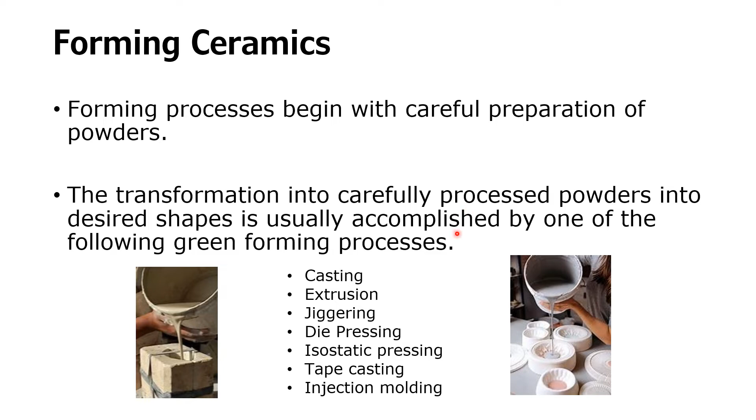I enjoy being alone more than going out with so many people. I don't know why. I'm typically a very shy person, and it's very quiet if you are in a remote place - just you and the mountains and the ground and air and some trees, and you can create things you cannot do inside of the city.

Okay, let's move on. The post-processing of ceramics is both difficult and expensive. We already know ceramics are hard and brittle after they are fired, and we always need expensive tooling and time-consuming processes to machine them.

So most forming processes are designed to produce a finished product, or one that requires very little post-processing, to avoid this expense and difficulty. Most forming processes produce, again, green ceramics, which have very, very low stiffness.

Here it is showing you how you're shaping your ceramics in the mold. And here you're using automation to shape the ceramics and form your green ceramics right there. Green is not the color - it's just the intermediate product of ceramics after forming.

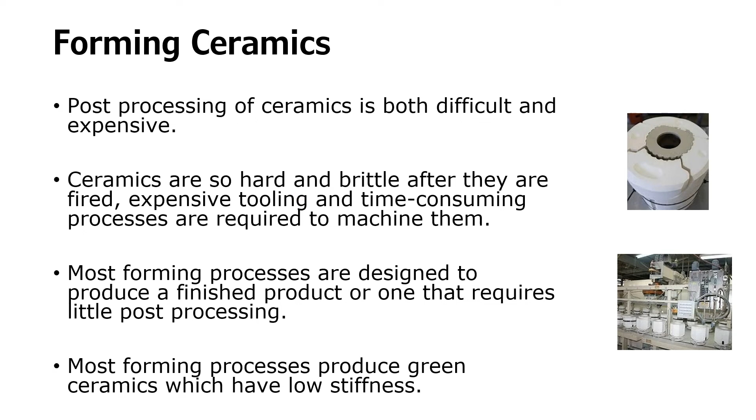Okay, casting. So in casting, we're going to take a look at slip casting. Most of the ceramic products are formed by this method, casting. We have two types: the first one is slip, and the other one is solid.

Slip casting is used to form hollow shapes such as toilets and sinks. Slip is a low viscosity ceramic slurry - slurry is nothing but when you mix and then form a slurry.

And slip is poured into plaster - we're going to pour it into plaster. So here you can see your slip right there, and this is us making slurry.

And then you're going to pour it into a plaster of Paris mold, which is in the shape of your product. It's a very easy process to do, and your product comes out - we call it green ceramic, green product, or green body.

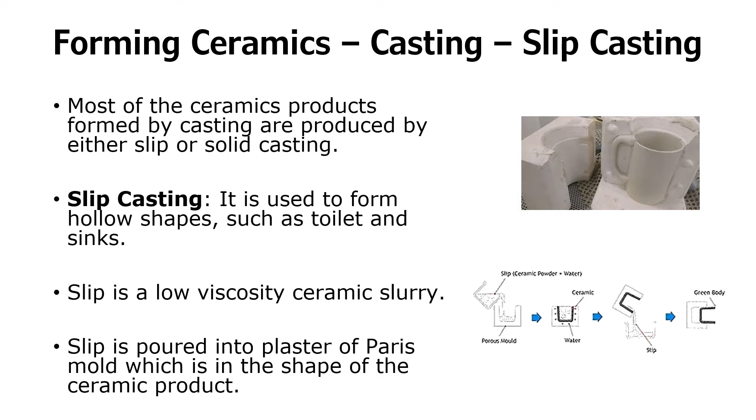So here is a cartoon picture, and you can see right here we're mixing - that's you preparing your slip or slurry. Then we're going to put it in the mold - this is your plaster mold - and it's just showing you how the liquid fills inside of that mold.

We're going to tighten the valve so it won't leak out. Give it time, and they're going to form the cast.

Then you're going to drain it. In order for you to make the hollow container bottle, so here in this case is a pot, you've got to drain the interior part of it. And in order to pour this liquid and keep that as a liquid, you have to play with the temperature very, very accurately. Otherwise everything is going to be jumbled up right there, and you're going to have a big mass or solid chunk. So going from here to here is a secret of slip casting.

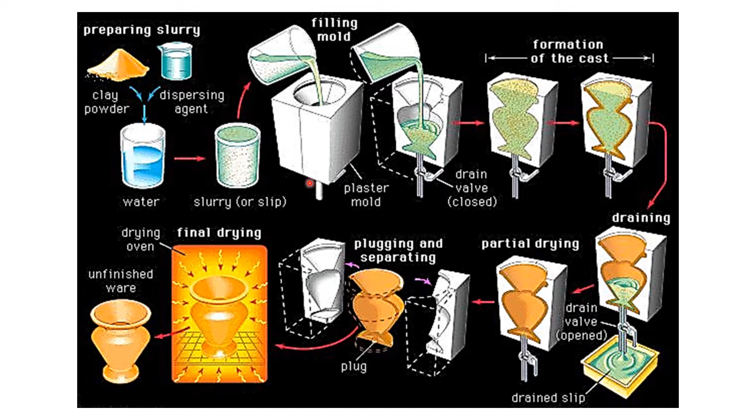So when you actually do molding by yourself, you're going to bump into so many roadblocks. First, the mold and your product stick together and won't come off. Second one, it won't drain. So definitely prepare the slurry in a way that they will come off and the interior part will drain. Now finally you dry it in the oven, or you can bake it outside as well. And this is called your unfinished, where your green product is going to come out. I think you got the idea. Your toilet, your sinks, many different kinds of bathroom and kitchen stuff are made this way.

This is a textbook version or picture. They're pretty simple. You have your plaster mold. You have your slip right here. The slip is poured into the mold. And here water is absorbed by the mold. So this mold is prepared to absorb the water from the slip. And the excess slip is going to be removed by draining it out. And then the finished hollow part is right there. And then you follow your drying process and then get it out of the mold.

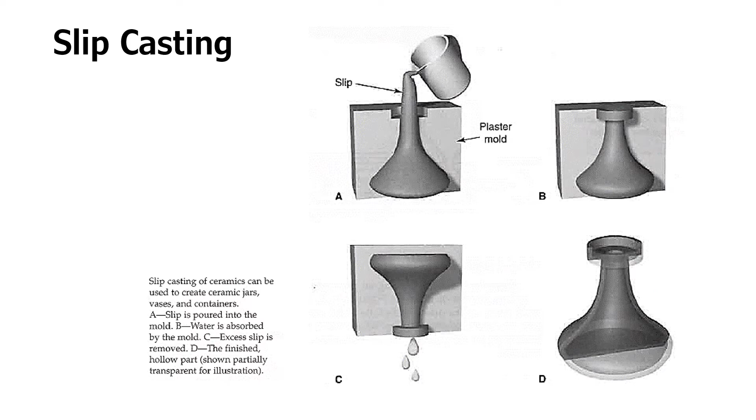Solid casting process is the same as slip casting, but the mold includes a riser column, a higher column, to feed the slip, and they use capillary action. So slip here, you can see, is poured into the mold, leave it for a time, and it's gonna solidify. And here you're gonna get your finished part.

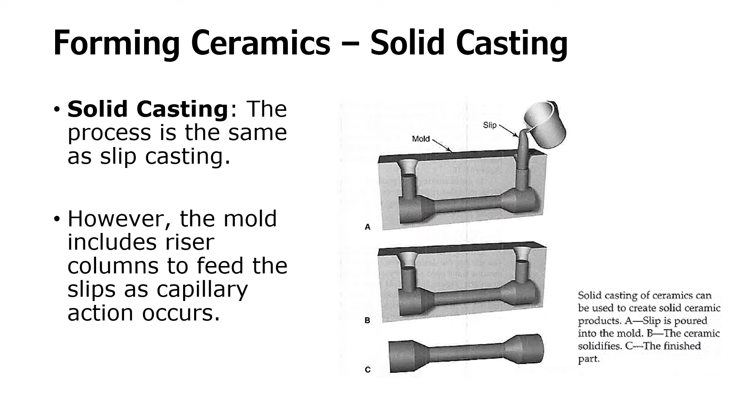Extrusion, kind of a review from your plastic, this is a similar looking extrusion instrument. So ceramics can be extruded using a screw extruder. And don't forget your heated barrel and your hopper. This is where you're gonna add your slip, or I would say just slurry for ceramics. And then you're gonna use your motor. It can also be done manually by hand. It's just mechanical energy that you are supplying to push this screw. And again, you have to heat it. Then you pass your die head, your cavity. So we make bricks, pipe, ceramic tubing, and some electrical ceramic components by extrusion.

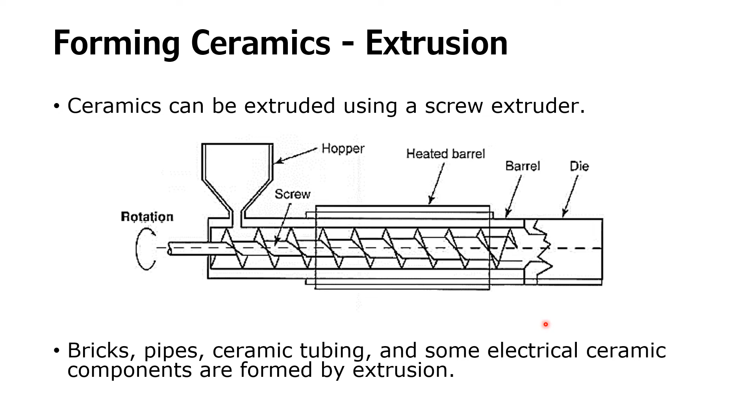So if you want to play like me, you can try jiggering outside. We're gonna have a machine shop as well downstairs, but I'm not quite sure that we're gonna get into industrial material. But in the future, we will do this and that, so students can play with it.

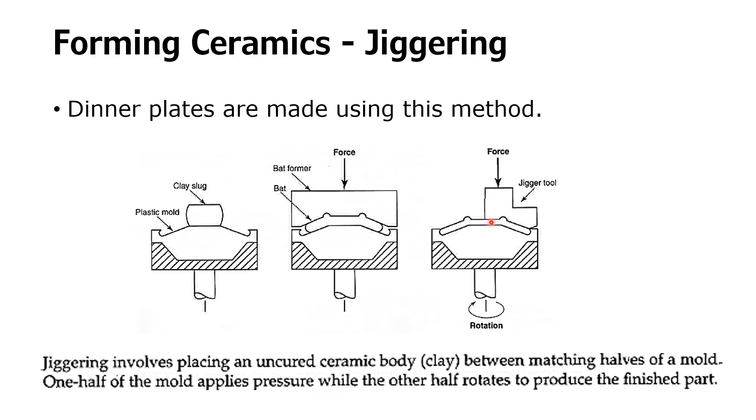Die pressing is a little bit different. This process uses steel and carbide dies and hydraulic force.

So this force is applied to clay to conform it to the die cavity with a tremendous load. Then the conformed clay is heated. A variety of products including ceramic floor tile, ceramic wall tile, and many electronic components are made with this process.

So here die pressing of ceramics involves again heat and pressure. Pressure is very important if you want to shape a complex design, because you can't just push it so fast. They're not going to form the way you want them to. So you will play with heat, and then you're going to play with pressure.

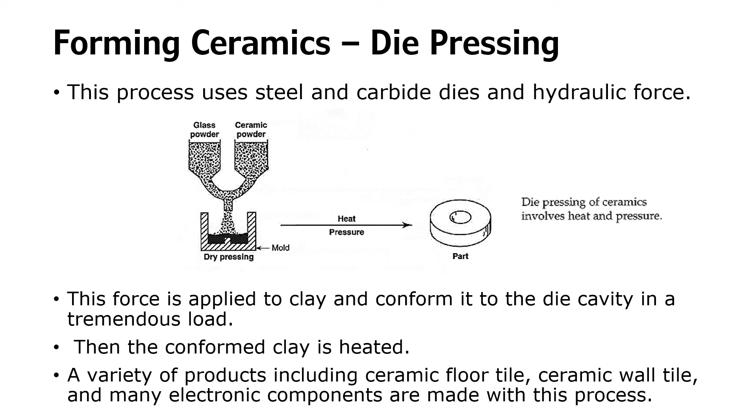Isostatic pressing: more complex ceramic shapes are made. Again, your key point is right here, complex shapes are made with isostatic pressing. Be careful with your heat and pressure. This method uses pressure vessels to apply fluid pressure to the outside of the mold.

So here you can see the rubber bag or metal cylinder where you put your ceramic powder, and then we're going to use fluid pressure, and this is your pressure vessel right there. It's just pressing. Pressing means applying a constant force to shape the product.

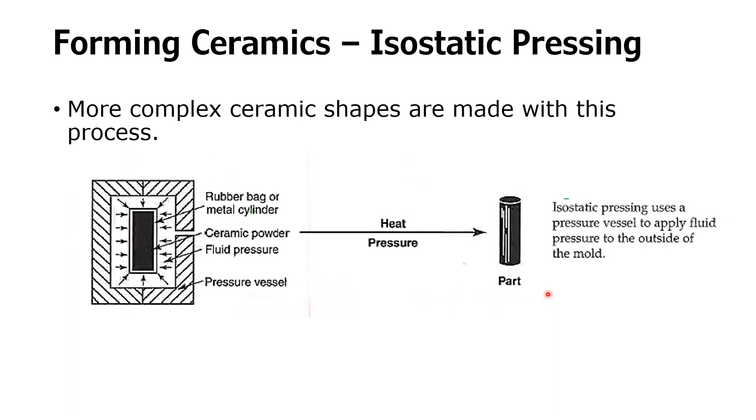Tape casting: you need to pull, so we set it up this way with some pulleys right there. This is a primary process used to form ceramic substrates, and we use it to make integrated electronic circuits. Tape casting involves drawing a powdered slurry, see that line right here, controlled by a gate.

So here we put the ceramic slurry, and then you pull that powdery slurry. And here, this is your blade, a blade or a gate right there. Pull it to form a thin layer on a moving plastic belt. Then roll it up, and that's your green product right there.

This is just showing you that the slurry is loaded onto this film, because you need a surface to pour the ceramic slurry on, and then you pull with this motor's mechanical force in that direction. That's just drying, in a drying chamber. But it's also the shaping structure, because it goes underneath that surface to the other side to be rolled.

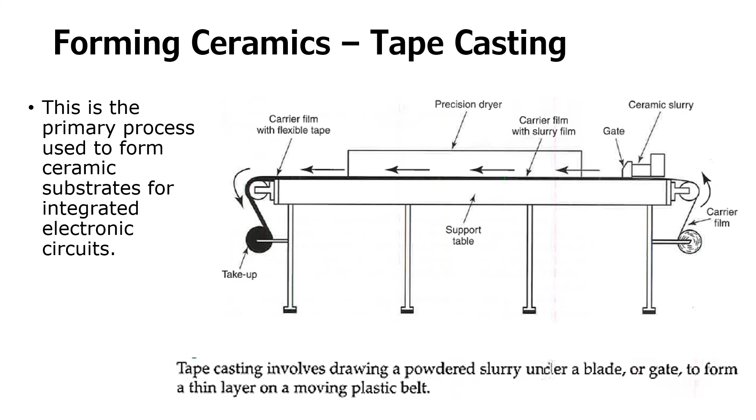Injection molding is kind of a review from plastics. It's the same as injection molding for plastics. Here's your hopper, throw your slurry or ceramic powder right in there. You can heat it up. That's your heated barrel right there, and your mechanical force right there. You push the screw, and then it comes out from your die head. What are we making with this process? Again, complex solid shapes.

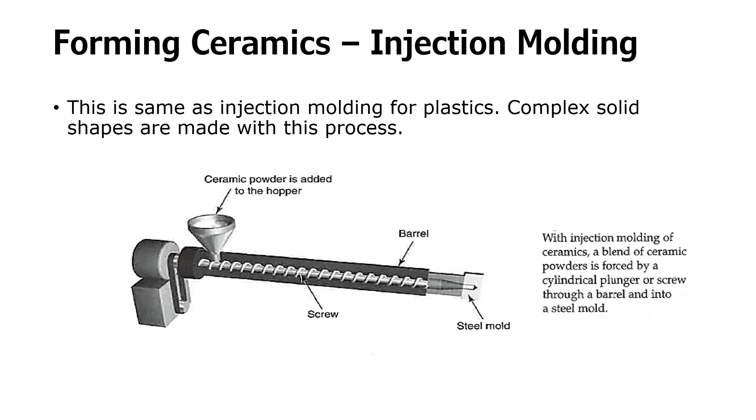Post-forming processes. We don't want to do post-forming because it's expensive and difficult, but sometimes you have to. Post-forming processes start with drying. The purpose of drying is to remove moisture from the green ceramic body before densification takes place. Densification involves reducing voids, that is, reducing the porosity of the ceramic body, to form a dense part.

Densification is achieved by reducing voids or porosity, and we use three different techniques. One is sintering, in which we use high temperature and viscous flow. Hot pressing uses a graphite die, pressure and heat. Hot isostatic pressing, HIP, uses high temperature and gas for complex ceramic bodies. Those are what we use in post-forming processes.

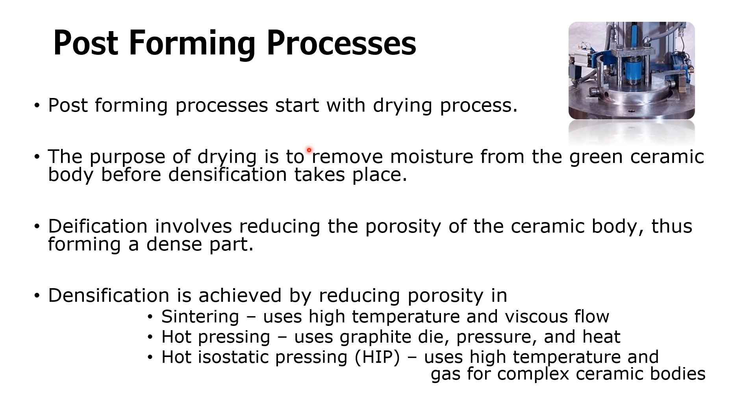If you don't have money right now, just write down the textbook name and keep it, and when you have money, buy it, because you will need it one day. I have nothing but textbooks, and every time I need something or write something, I go back to them. They're very, very valuable. All right, that's it for part 3.